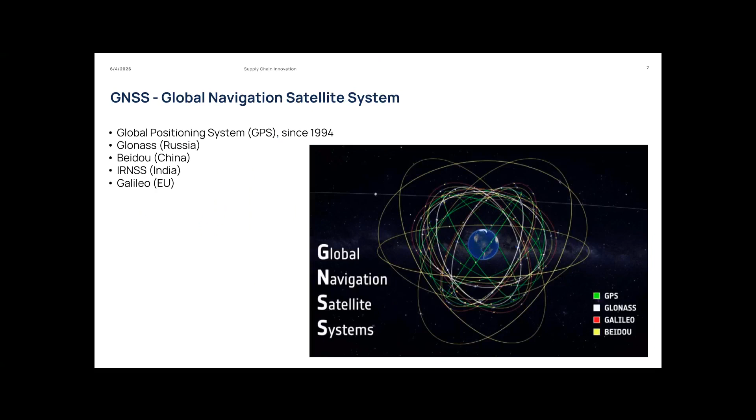So at least 4 satellites simultaneously visible from our side, but the number of satellites for each constellation is much more because we need to guarantee coverage all over the planet. The satellites we see right now over Milan are different from the satellites visible over the United States or over China, because satellites can only cover a specific portion of the Earth at any time. Since the Earth and satellites are orbiting, there is a continuous variation of which satellite is visible on which specific side of the Earth.

It seems easy, so it's just a measure of when the signal is arriving and when it was transmitted. In practice, there are a lot of errors in the world. First of all is the propagation through the ionosphere and troposphere, which is not ideal at all, but that is related to wireless electromagnetic propagation, not at the scope of today. So we are not entering into the details of physics. Some principles of propagation you should have seen in physics courses in the first year of the bachelor, but that's not the point. It's just to mention that propagation in the atmosphere introduces possible errors.

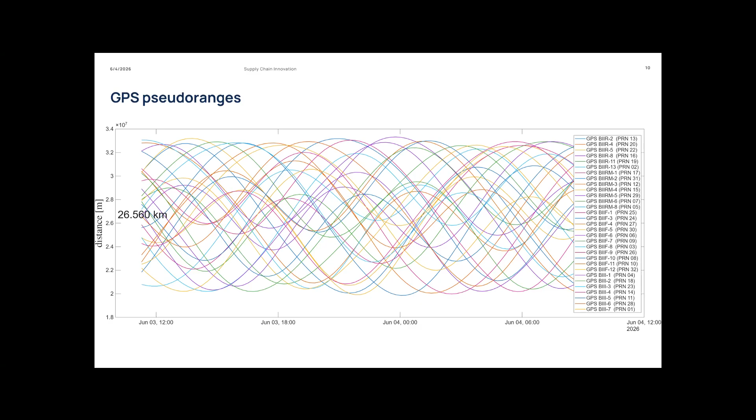Receiving at least 4 of these signals allows us to estimate the 3D position and basically allows us to see where we are on our Google Map or Apple Map or whatever navigation app we are using. So the final use is actually very simple. We just see a circle or a pin on our smartphone, but that is the result of complex processing and wireless propagation phenomena that started 26,000 kilometers far away from our side.

If it's not range, it can be range difference - no longer the distance but the difference of distances. We take, for instance, device sensor 1 as a reference, and compute the difference with respect to sensors 2, 3, and 4. Now we don't have a circle anymore, but a hyperbola - that's the geometrical interpretation of difference of distances. The user is located all over this hyperbola, and intersecting the different hyperbolas provides the final user position.

The difference is that we need to use one reference. This means that with a sensor network of 4 sensors, we can only have 3 time difference measurements, while in the previous case with 4 sensors we have 4 time measurements. A drawback, but it's because this difference of distances mathematically eliminates the clock difference between the device and the sensor - a way to deal with inaccurate or non-perfectly synchronized devices. So when the user device is not perfectly synchronized with the network, this type of measurement is used instead of the previous one.

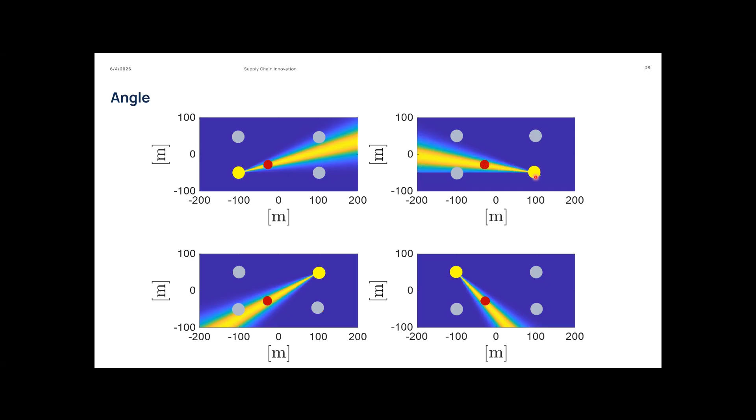Another type of measurement is the angle - no longer a circle, but a cone of information with respect to each sensor. What's the property of this cone? It increases the uncertainty with increased distance. The more we move far away from the sensor, the more the uncertainty is, so angle information is more accurate if the user is very close to the sensor. But overall, the process is always the same: measuring the angle from the four sensors of the infrastructure, intersecting, and getting the final estimate of our position.

The last type of measurement is power. Power still produces circular-based information with respect to the sensor, but unlike ranging, in wireless propagation power decreases logarithmically with distance, so the accuracy is worse than traditional ranging. Still, the concept is measuring power with multiple sensor infrastructure and intersecting them to get a final position, though accuracy with power-only methods is not always good.

So here we easily get errors of tens of meters because we cannot get an exact power measurement. This is why power-based information is mainly used not for absolute X and Y positioning, but for proximity positioning: assuming the device is in the area of one sensor rather than specifying its exact coordinate. If a device receives the highest power from a sensor, it is said to be in its proximity, located in that sensor's coverage area. So if a sensor has, say, an area of 100 meters, the device is somewhere in that 100 meter circle, no matter where exactly, since we know it's connected to that sensor.

Having seen the different technicalities and ways of positioning measurement, let's now see the evaluation. Imagine you have your network of sensors. How do we understand or measure the quality, the accuracy, or how it performs?

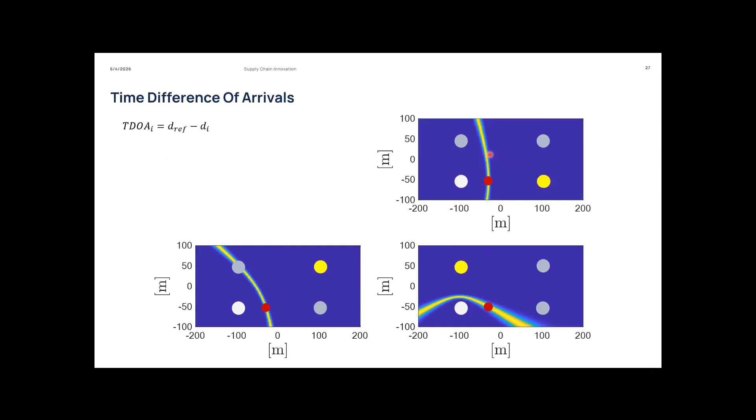Because the more devices you have, the more they interfere with each other, and the more computational complexity is placed on the server. Imagine this architecture: the more devices you add, the more processing load is requested of the processing unit. There's a maximum tolerable number of devices such that you don't saturate the processing and still provide a final position estimate in time, meaning within a specific maximum latency threshold.

Another metric is accuracy: how close the estimate is to the real location. And precision: how much the system is able to replicate the same result under the same conditions.

Complexity is the degree of hardware, software, and operating factors of the full localization solution. Robustness is the constant system-level accuracy over time: the system must continuously provide positioning estimates in a reliable and accurate way, even if the technology becomes updated or the hardware ages.

Reliability is the percentage of valid positioning results. We also need energy efficiency: understanding which sensors are best, whether they need a wired electricity connection or can use a battery. For battery-based sensors, energy consumption is strongly related to how many months or years the system can be deployed without intervention to replace the battery, and there's a trade-off between how much measurement time we provide and how long we want the battery to survive.

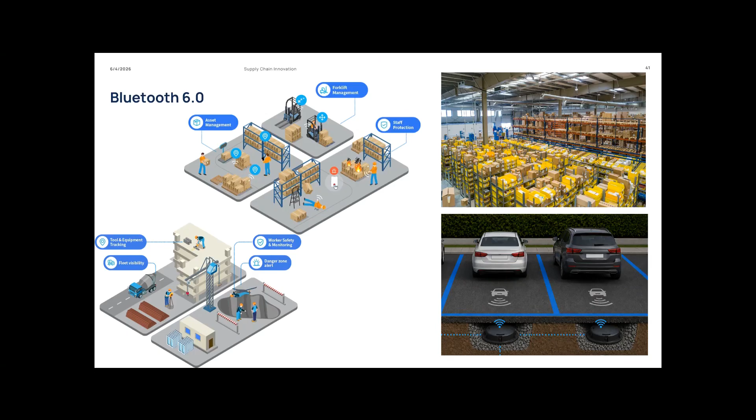Another technology is RFID, radio frequency identification, which can be an active or a passive technology. Passive technology is basically our credit card system. So you do not have a battery in the credit card, but just a passive electromagnetic intelligent chip on your card that sends and reflects information towards the reader, the shop.

Or we can have active RFID systems, like the one we use for paying the highway in Italy. In that case, the devices have a battery. This type of technology acts with a sensor, so our infrastructure sends a query signal, and the RFID chip replies with a response. So it's a query-receive mechanism. In the case of a credit card, the paying device at the shop is the query sender, and the receiver is the credit card that prepares the signal. In the case of a tolling system, it's a device on the tolling gate, and our telepass-equivalent solution is the responder.

This is a technology that is extremely accurate. This is an example of a test I did for different companies, showing that overall we can have centimeter level of accuracy.

But the drawback is that the sensing infrastructure, the device that constitutes the infrastructure side, has limited coverage, typically not going beyond 50 meters. In some cases, if there is no obstacle in between, you can go up to hundreds, but in practical conditions it's 50 meters of coverage. This means a lot of installation, manual intervention, and manual maintenance to do for installing and keeping the system operative.

Even if we are in a full complete industrial environment, where you see there are lots of metallic objects -- as I said at the beginning, objects produce reflection, shadowing, and if they are metallic, they completely block the line of sight. So the industrial environment is the worst environment for positioning because of the metallic presence and machines.

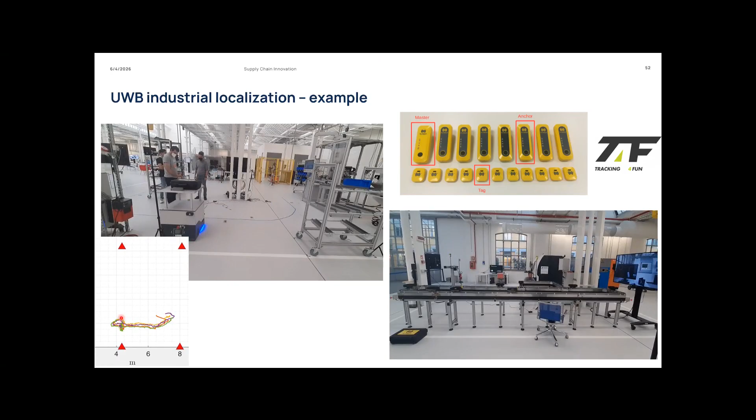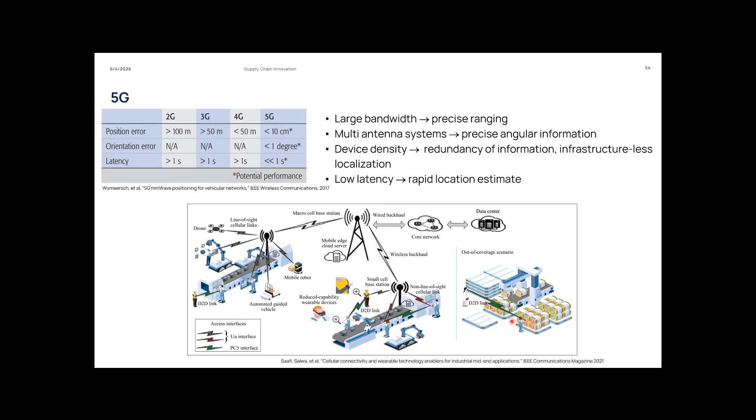So the concept of Wi-Fi is definitely equivalent to 5G. Both of them are comparable in terms of operational point of view, as technologies for joint communication, which is the first primary use case, and position.

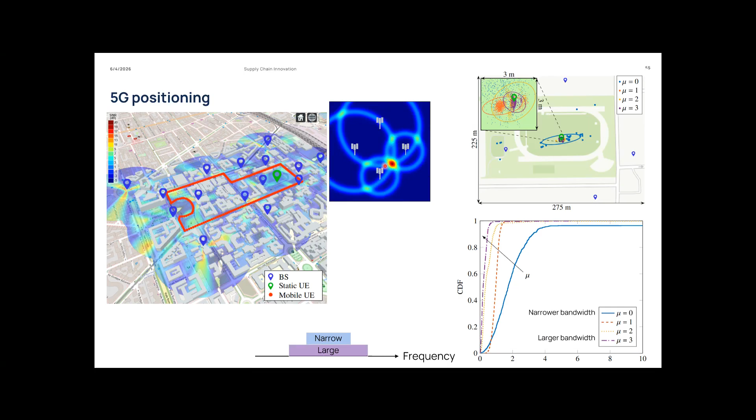5G also has implications in industry. In a smart connected industry, you can have 5G connectivity and positioning service in different contexts, different applications, different use cases with different KPIs, but all addressable with the same care, so in hospitals, letting the navigation of drones, in retail stores for in-store navigation, but also for personalized offers, etc.

Overall, you see that use cases are always the same. Use cases that can be addressed by RFID, Bluetooth, Wi-Fi are more or less the same, but they are addressed differently.

This is exactly one technology that fits all. 5G can be, let's say, a super competitor with respect to all the other technologies we have seen so far, because it can address all of the use cases, but also guaranteeing the same accuracies, at least theoretically, with respect to all the others.

The only difference is that the others are already mature, already commercially available. 5G is not yet commercially available so far, but it is expected to address the positioning concept, benefiting from almost worldwide coverage, because cellular connectivity is available almost everywhere, or it's going to be.

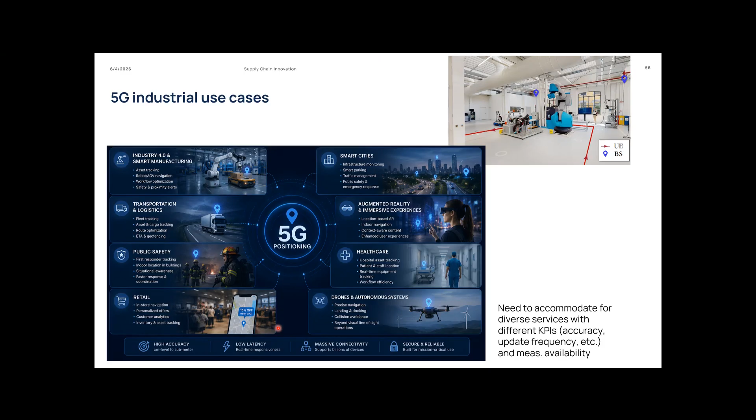It's like repurposing it. So if instead Bluetooth sensor networks or ultra wideband sensor networks require specific installation, 5G can actually exploit cellular operators that are already unavoidably installed in the system. Then, if you need a specific 5G service inside your house, you have to install specific base stations there. But overall, at least for a consumer positioning service, everything comes in a passive way, just like GPS, more or less.

Let's now move completely to a passive technology, which is radio detection and ranging. It is a system that sends electromagnetic signals and listens to the echoes reflected back by the targets. Any object has a specific response to radio frequency impulses. Metallic objects have higher reflectivity, the human body has much lower reflectivity, but overall, objects reflect the signals.

This is why we have multiple copies of the received signals—it's exactly the same concept. The difference is that here, the copies of the received signals are measured by the same device that transmitted, in case of a monostatic system, while if the reflections are measured by another receiver, it's a bistatic system. But overall, the system measures these two ways of signal reflection, from the transmitter to the object and from the object to the receiver, and estimates its location by measuring the distance and also the angle.

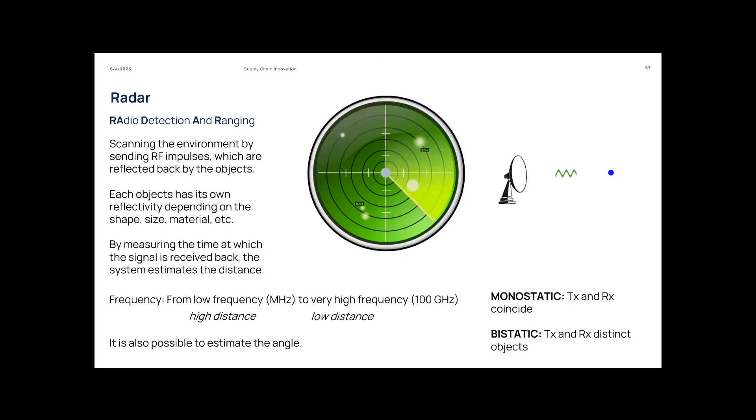A very similar technology is LiDAR, but the difference is it doesn't use radio frequency information, but optical, so basically laser. It's just a frequency shift, but the key technological problem is the same for LiDAR and radar—same physical concept. The only difference is that radar can somehow also penetrate objects while LiDAR cannot, because light doesn't pass through objects at all.

The result is that we have a lot of obstructed areas. Look here, this is a LiDAR on this vehicle, and the vision the vehicle has from all the reflections of the objects. But look what happens when the light arrives and bounces back from another vehicle behind. What's beyond that vehicle is completely obscured, so it's not possible to see at all in this area, because the light cannot pass through the vehicle itself, but is reflected from all the environment.

Even with this drawback, overall this system is super accurate. The accuracy is definitely, I would say, the best on the market, because LiDAR systems can have 1 centimeter of error—definitely unbeatable right now. Another solution in passive sensing is camera.

Cameras shouldn't be intended like just RGB cameras like our smartphones, but there are different types of cameras. For instance, the thermal camera, which provides even richer information than traditional cameras. But no matter the type of camera, the objective is to detect something. They are used for detecting objects.

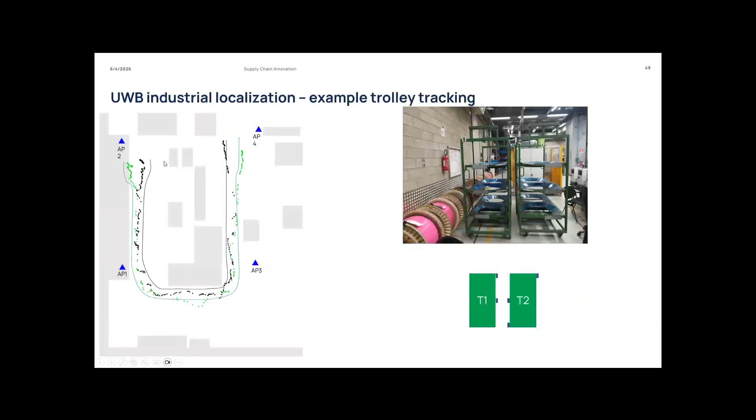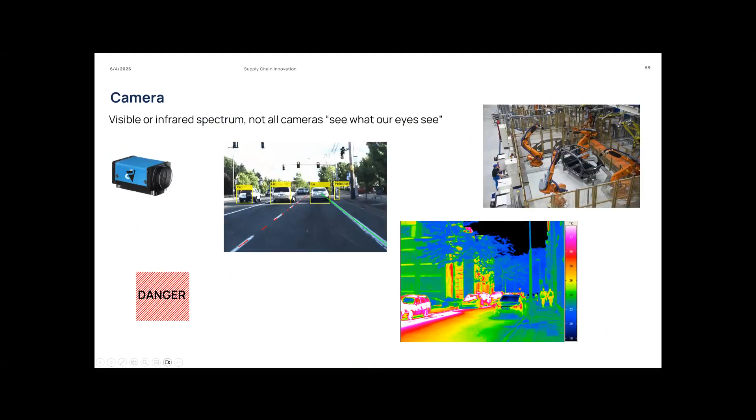Or, on the other hand, you can add information on the measure. This is the same industrial environment I showed you before, with 4 access points, 4 anchors for the sensors of the infrastructure. This is exactly the top view of that same scenario. These gray areas are the machineries of that area. So we have the 4 anchors, the 4 sensors, the machines, and this is the user.

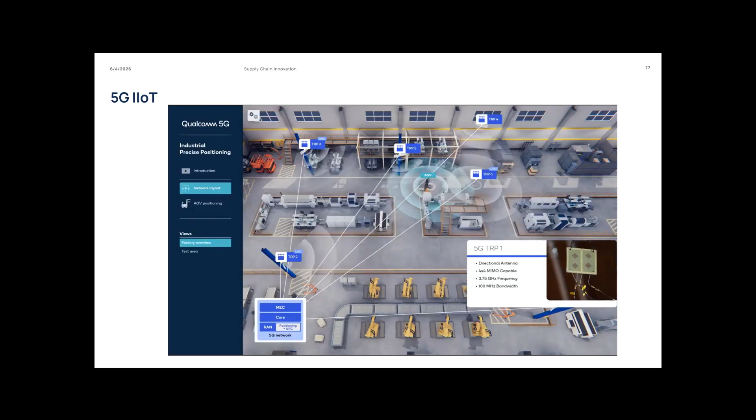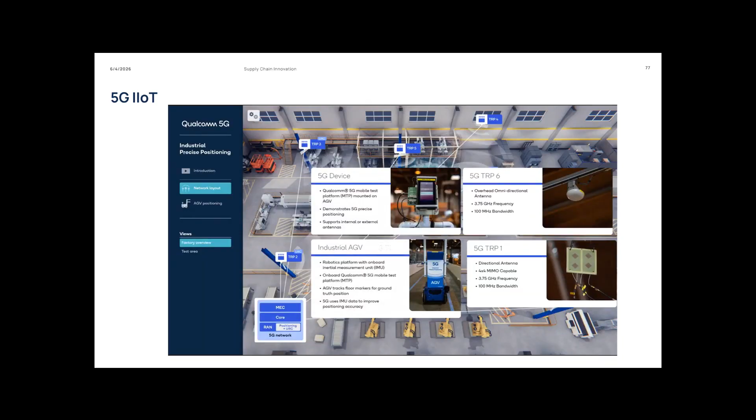In this demo, we're showcasing the 5G precise positioning use case with our over-the-air test bed and the AGV beside me, which has a 5G test device and an inertial measurement sensor on board to complement 5G positioning. Our 5G test bed uses 6 transmission reception points, or TRPs, operating in a deployment-friendly 100 MHz bandwidth in sub-7 GHz frequencies. The sounding reference signal, or SRS, transmitted by the AGV's 5G device is received by multiple TRPs.

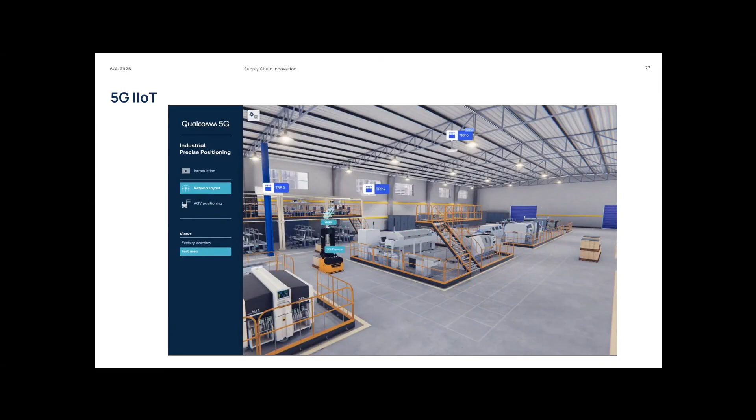The AGV's position is triangulated using the uplink time difference of arrival technique, or uplink TDOA. Positioning precision can be enhanced with inertial measurements from the onboard sensor.

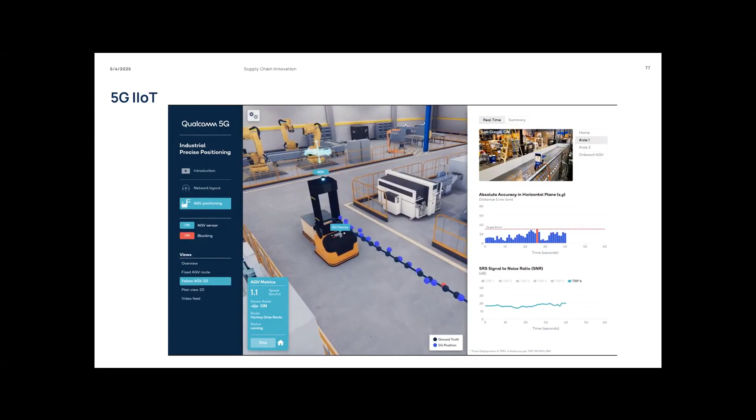Looking at the key performance indicators now, we have an absolute accuracy plot that indicates real-time 2D positioning error in centimeters. Below that, we see the signal-to-noise ratio in dB of the SRS from the 5G device received by all TRPs. As the AGV moves along the route, it provides reliable, accurate, and periodic ground truth positioning, shown with black dots, which is then compared with the 5G position estimate in real time using uplink TDOA technique, shown by blue dots, to compute positioning accuracy.

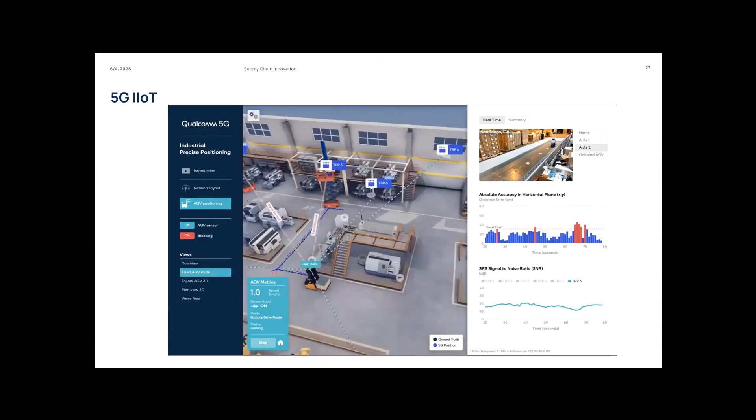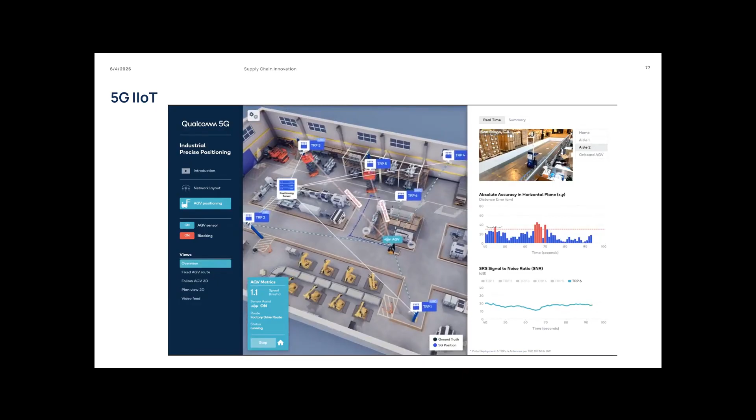Uplink TDOA is a network-based UE-assisted positioning technique where the UE transmits a reference signal and the network measures the difference in time of arrival of the SRS at different TRPs relative to a reference TRP. In both downlink and uplink TDOA, the TRPs need to be synchronized, but the key benefit of TDOA is that tight synchronization between network and the 5G test device is not required.

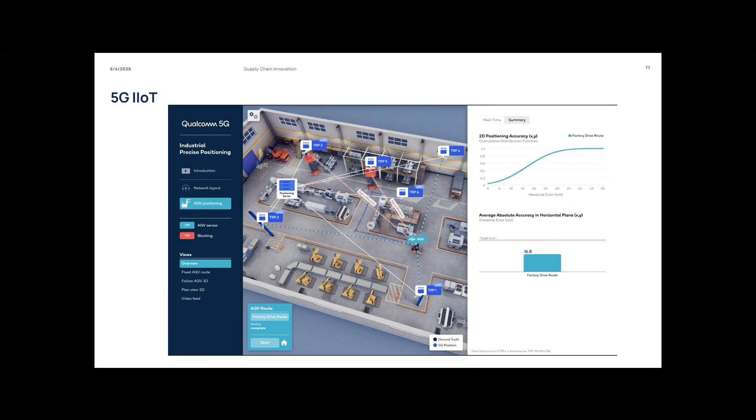As you can see, we are able to demonstrate centimeter level accuracy in this demo. We are also studying indoor precise positioning in challenging industrial environments. In summary, we've used a deployment-friendly 100 MHz 5G carrier over the air in sub-7 GHz frequencies for uplink TDOA positioning. We complement that with an inertial sensor for centimeter level precision as a proof of concept for 5G industrial precise positioning.

Maybe most of the technical names are unfamiliar, but that's not the point. The point is to give you the idea of 5G positioning. In this case, it was integrated with the inertial sensor, but that's not the point either. The point is that they show how it is possible to have an AGV, or automated guided vehicle, which transmits signals. Then there are base stations or sensors at the infrastructure side that receive and estimate the position, and provide that output back to the AGV, so that the AGV knows where it is and can navigate autonomously.

A similar example is now with our next video, which is more focused on IoT, so more on the production process.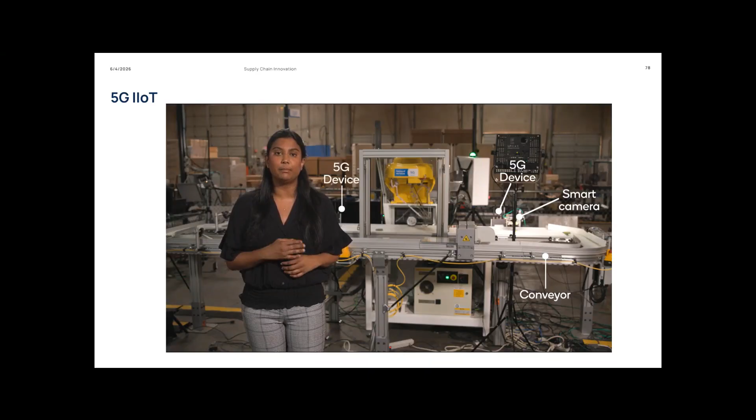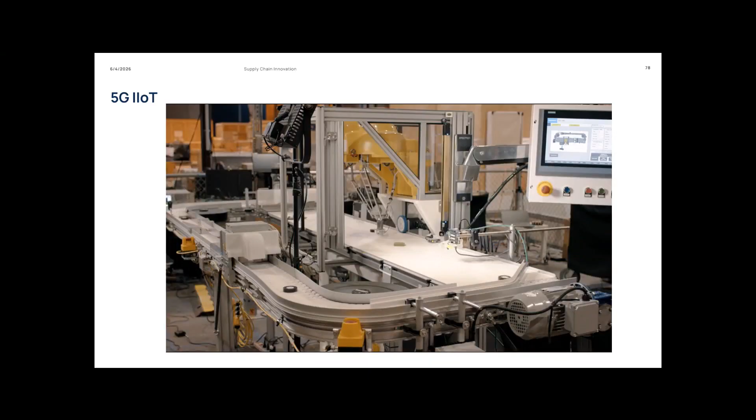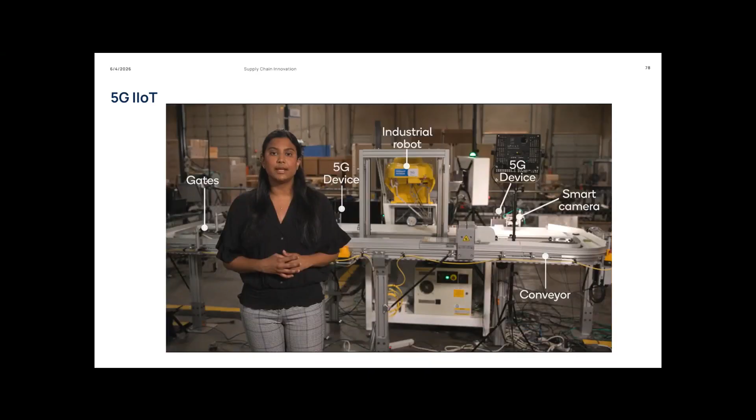Object detection triggers from the smart camera are received by the second 5G device connected to the PLC that controls the industrial robot and the gates. The robot must receive control signals from the PLC at the right time to correctly pick and sort the pucks by type, so synchronization is critical. The PLC also controls the gates, which must open at the right time for the pucks to move along the conveyor uninterrupted. 5G supports time-sensitive networking, or TSN, transparently across the network.

TSN is used to synchronize the controller with the various sensors and actuators, such as the camera, the robot, and the gates. In addition to TSN, another key requirement is ultra-reliability, which 5G delivers with coordinated multi-point transmissions, or CoMP, using multiple transmission and reception points, or TRPs. This will allow more robust transmissions in challenging radio environments. Finally, 5G sidelink enables direct communication between the smart camera and the PLC with just one hop.

Now, let's look at the demo's dashboard. Since TSN and ultra-reliable communications, or URC, are switched on, we see 0 packet errors and sub-microsecond time synchronization, despite 2 of the 4 TRPs being blocked. When we turn URC off, we see the signal strength dropping since 2 of the TRPs are blocked. The number of packet errors increases due to signal degradation.

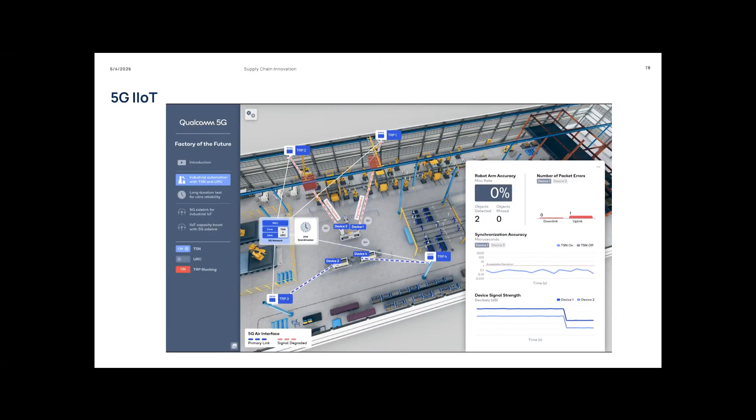When we turn URC back on and TSN off, we see the signal strength recover and the packet errors return to 0. But time synchronization is now much poorer than 1 microsecond, which degrades robotic arm accuracy, and many pucks are being missed, as shown by the red beacons around them.

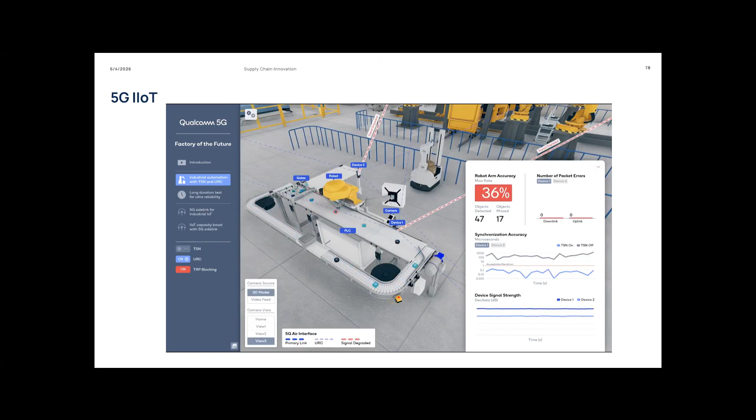Over a 24-hour period, we only achieved 3 nines, or 99.9% reliability with URC off. With URC on, reliability increases significantly to 6 nines, or 99.9999%, giving industry the robustness needed to go wireless with 5G.

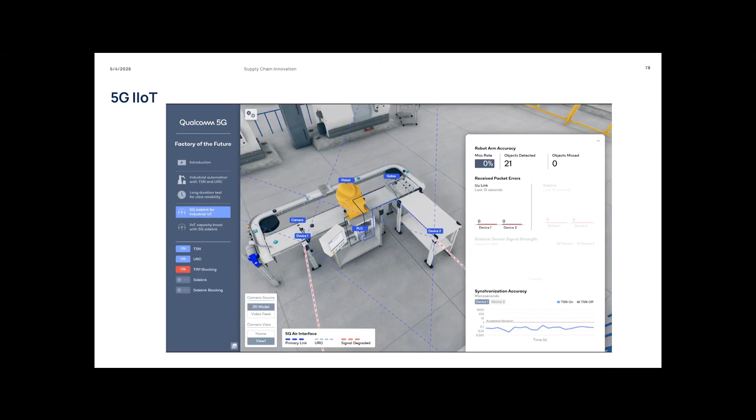The new 5G sidelink between the 5G devices has been off all along. From a different angle, we can visualize the activated 5G sidelink for direct device-to-device communications. If the sidelink gets blocked, the packet errors for the 5G sidelink increase, but the 5G air interface to the gNodeB has no packet errors due to URC and can be used as fallback.

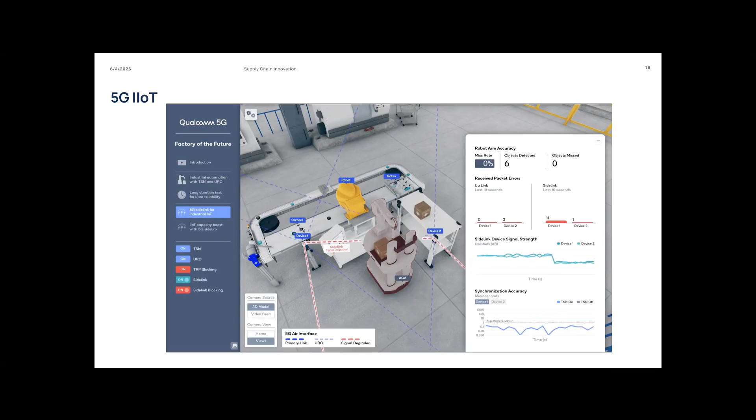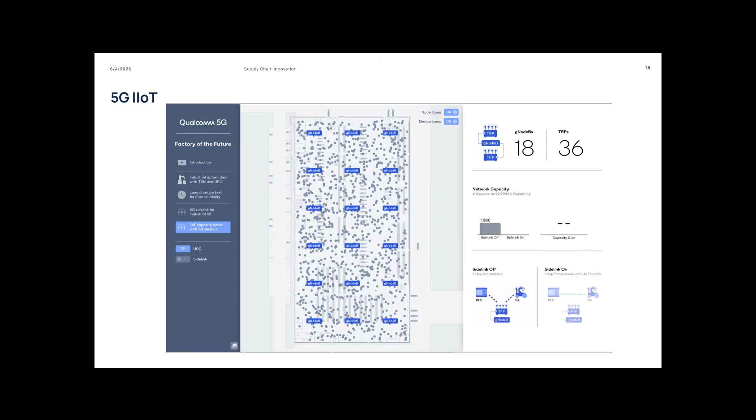By default, when 5G sidelink is off, 2 hop transmissions must be used between 5G IIoT devices. The network has enough capacity to support 1080 IIoT devices with 6 nines, or 99.9999% reliability. With sidelink on, 5G IIoT devices can use 1 hop direct transmissions between them.

2 hop transmissions are needed only if a sidelink transmission fails due to a blockage, for example. The simulation shows 5G sidelink drastically increases the devices supported from 1080 to 1980 with 6 nines reliability, a capacity gain of 1.8x.

In summary, we have demonstrated key 5G capabilities over the air, like advanced ultra reliability with coordinated multi-point transmissions, time-sensitive networking with microsecond level synchronization, and direct communications with 5G sidelink for boosting industrial IoT capacity in the 5G factory of the future, which is why we believe 5G sets the foundation for Industry 4.0.

An important message here is that joint positioning and communication can actually use 5G, which is wireless. So 5G connectivity in a factory doesn't require cabling all the devices. Everything is done wirelessly. And if you think about it from an installation perspective, not only cost but also the efforts and problems it may cause, this is a super advantage.